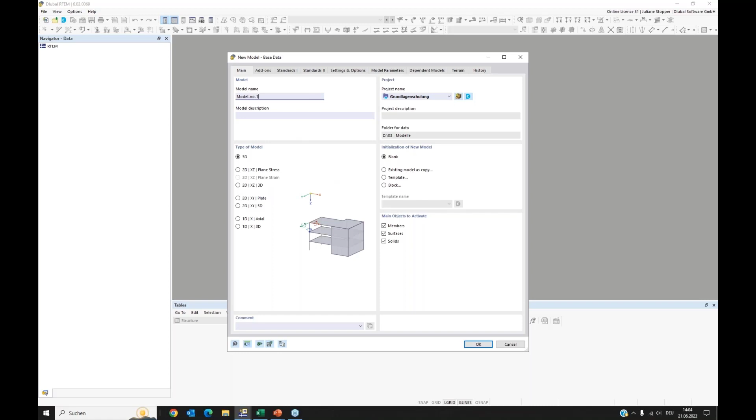In this register, I don't need to change anything. We can jump to the add-ons register and activate our geotechnical analysis add-on. We can find this in the area where the special solution add-ons are placed. So I activate it and press OK. Then our model is prepared, and the add-on will be integrated into RFEM. Here we go - we have an empty model now, and we can start modeling.

At first we go to the materials, and I will create the materials that we need in this first model. I will use materials from the library. We can open the library via this button, and I will use a gravel, a sandy gravel, as the first material. I apply this, then add a next material - we can have a sand, maybe coarse sand - and we add a third material, a medium plastic clay. This is just an example of materials because we will focus on modeling today.

One more thing: when we have the geotechnical analysis add-on activated, we can select the material type soil. When we have a material of type soil, we can find the valid soil material models in the material model section. We currently have the Mohr-Coulomb model, and a nonlinear elastic material model. This model is able to represent the stiffness dependency - the stress dependency of the stiffness of the soil - and it also uses different stiffness for first loading or unloading and reloading. We will have the hardening soil model in the near future.

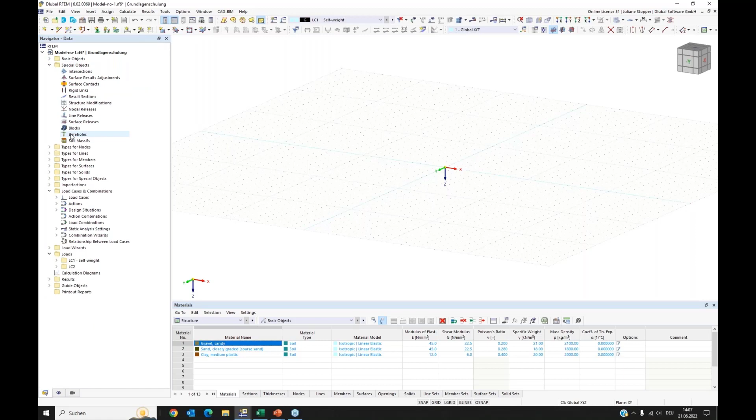We will go directly to the special objects, and here we can see 2 special objects that came with the add-on geotechnical analysis. We have here the boreholes, and we will now use them.

Here we see the dialog for entering boreholes. The boreholes provide you an option to directly enter the data you have from your geotechnical report. For different locations at your field where you will construct your building, you have values along the depth that came from that report, from tests and so on. You can enter this here, the location of that borehole, and you can enter a groundwater level. We will do this here. We give 4 meters. And here you can assign the soil layers.

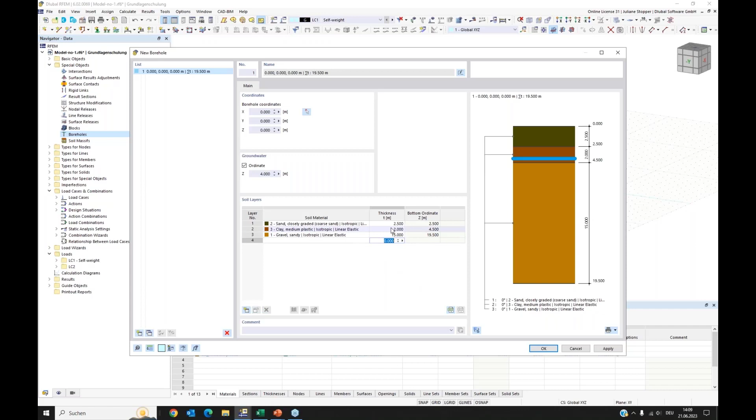We start from the top and go into the depth. In my example, we have sand at the top, about 2.5 meters deep. As the second material, we found clay. It shall be 2 meters, and then we have gravel, which is 15 meters in my example. Now we have the borehole data given, and we can say okay.

Then we see here our first borehole. I will remove this work plane, deactivate it so I don't see it anymore. Here we have the first borehole, and we need some more. We have, of course, more in our field, so I will now use the background layer. We can find it here in the navigator in the guide objects. At the bottom you can find the background layers, and I will open the dialog.

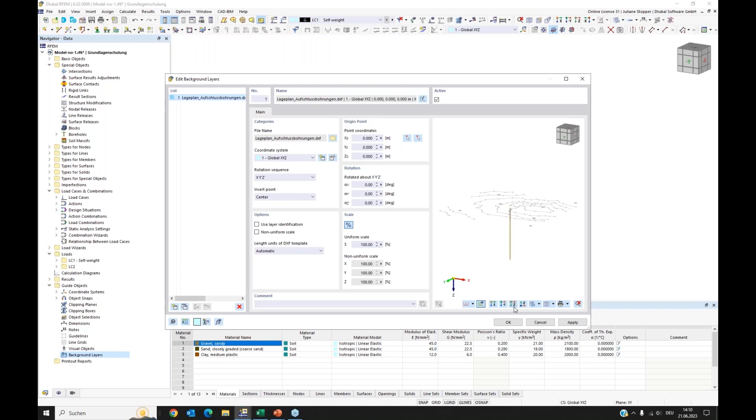As a background layer, we will import a DXF file, and I can do this here. I can directly go here, and here I have the plan of my area, and in that plan the locations of the boreholes are given. I see that I have to transform this. You can do this in this dialog, and this is the plan how it is correct. I want to use the option 'use layer identification.' I activate it, and there you can select the layers of your DXF file that shall be used for the background layers. I deactivate the DL nodes. This is a preview, and I accept this, and this is fine.

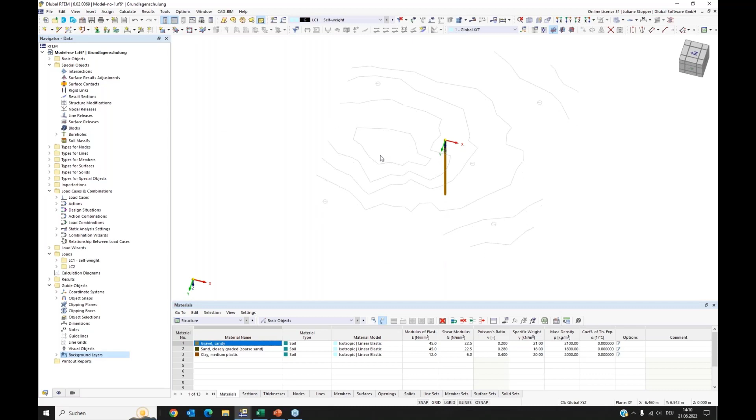Okay, now this is my map with the positions for my boreholes. I will modify the object snaps—you can also find this in guide objects. I only want centers to be picked, so I say OK and set to active. Now I want to place more boreholes via drag and drop at all these locations. Therefore, I create a node at the top just to help me doing this. Okay, now I can select this. I have my borehole and this helping node selected. I press Control and I can move it to the place in my background layer in the graphic. As you see, the last copy is always selected, so you directly can go on copying with drag and drop.

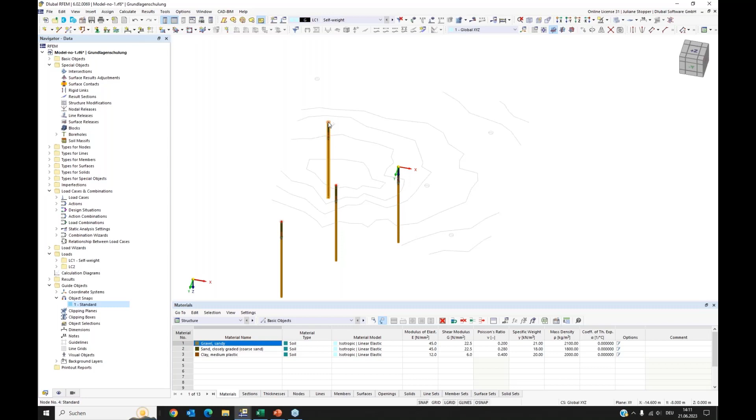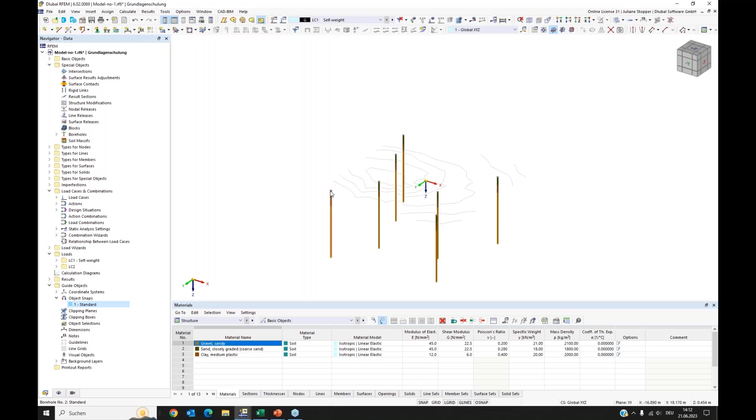Okay, that's it. Now I have my borehole at all the locations. I wanted to delete the initial one because there's none needed there. Now I have placed these boreholes at all the locations that I got from my project partner with that plan. I will delete these helper nodes—I just needed them for the process. And now I have my boreholes prepared. There was no need to measure these dimensions or fill in data manually; you could just use the drawing.

Okay, then I want to use my boreholes. I can use them for creating the soil solid that shall be analyzed. And therefore we have our second special object—you can see here we have the soil massifs, and I open the dialog for this.

With the soil massif, you can generate the soil solids you need for the analysis from boreholes. You can enter the numbers of the boreholes manually, or select them graphically. There I have them assigned.

Then you need to give geometrical information for the soil massif. You have to enter a center, which I keep at 0, and give the dimensions. I will give it 40 meters along both sides. And we have the option to activate a groundwater level.

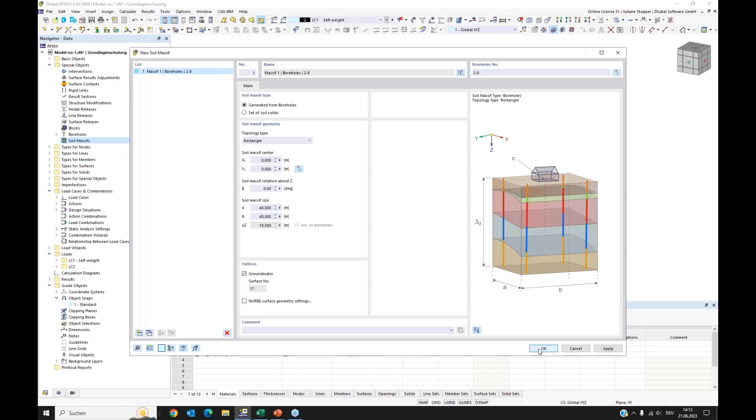Okay, we gave all the input that is needed, and now we can see our soil massif, our soil solids were generated. I switch on the solid model so we can see it more easily.

In the navigator for display, we have the option to change the display so that the color is dependent on the object property. We can also see here the material and the color that belongs to each material.

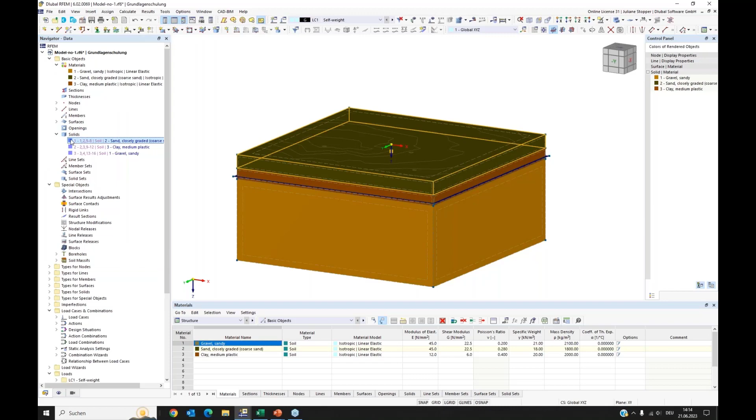So what came with our soil massif? Our soil massif generated 3 soil solids for us. We can find them here. For each soil layer, one solid was generated. And we also have a groundwater level surface generated.

And we also have surface supports generated, this and this. We can see them in this window when we go to wireframe model, for example. Here we can see it: at the vertical boundary surfaces we have sliding support, so only in the local Z direction these surfaces are supported, and we have fixed support at the bottom surface.

So with this generation, the solid is connected to these boreholes. If you change data in the borehole, if you change a layer thickness or something, the massif will be automatically updated. Yeah, so that's it—this is what I wanted to show with the first model.

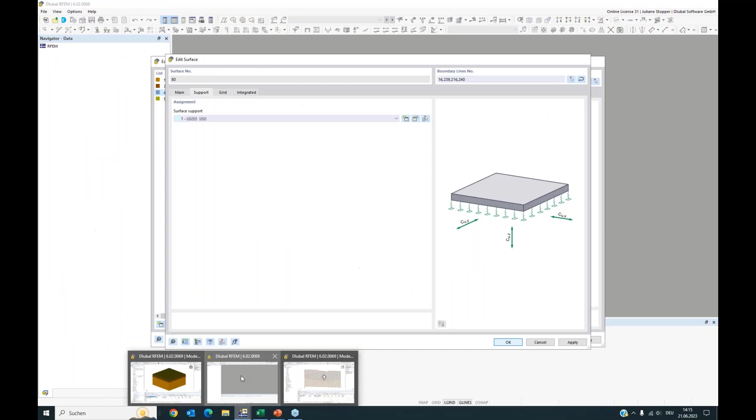We can go to the next example. This one is prepared. I will save it and we go to another RFEM for going on with the next topic. In this next topic, we want to use a DXF file again, but we will not use it as a background layer—we will directly import it. And this I can do here.

I go on File and go to the Import button, and here I can import a DXF file. I have to select the file—I have it here. This is a geological section of the ground, let's say, a drawing. And we will come to an import dialog where we can do last settings before the import.

Here again, I can use this layer identification, and again I don't need all these nodes. In this case my model is prepared, so I don't need coordinate transformation. So I can say okay, it can be imported.

So, and this is it. I have here now the DXF file imported, and now we can see the difference regarding the background layer. Here we have real objects imported—we have lines and we have nodes, and we can work with them. We can edit them, modify them, use them.

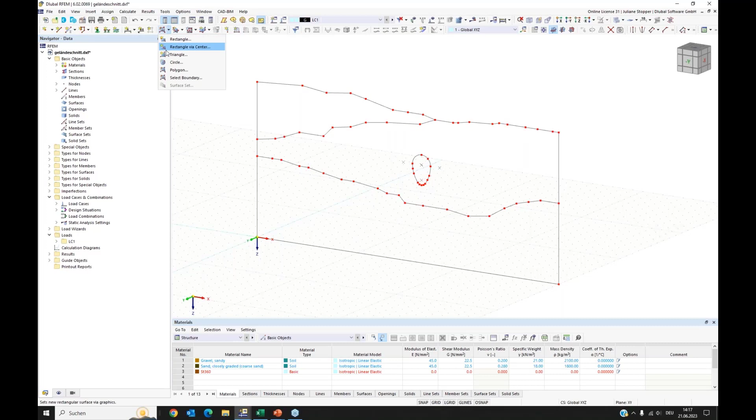Yeah, and this is what we will do. We will use them. My plan is to extrude this model into the depth, and therefore I need a surface here. And this we are going to do. We have here this button to create surfaces, and I use the select boundary option.

I need a stiffness type without thickness—I don't need a thickness, it's just a surface for being the boundary surface of a solid. Okay, I have the first one. I select the next lines of the second surface, and the third surface is defined.

Okay, then I want an opening here—this is, let's say, the shape of a tunnel, a small tunnel. And we have here the option to create openings. Again I use this graphical option where I can select the boundary lines graphically, and my opening is being created. Okay, with escape I can leave this tool, and my surfaces are ready.

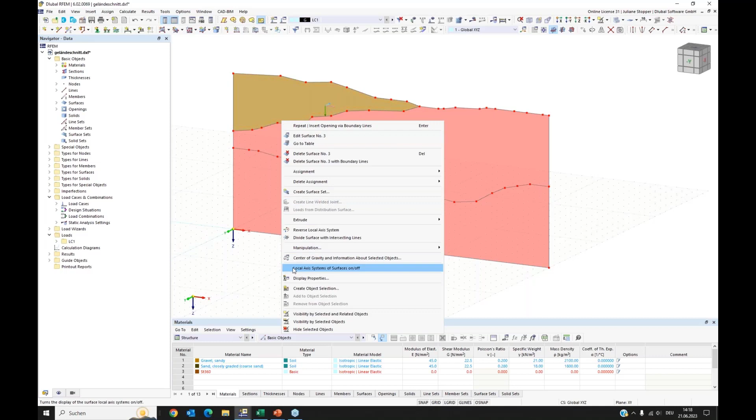Only I want to check the local axis. I can do a right click and switch the local axis system display on. Now I see my surfaces' local axis, and I see this one is showing into the other direction. I want to have them the same orientation, so for the surface I reverse the local axis system.

This helps me now for my extrusion. I now select all these surfaces, do a right click on them, go on Surfaces, and here I have the tool, the option to extrude—I extrude surface into solid. Okay, I have here this preview, but I can go here and enter the value I need.

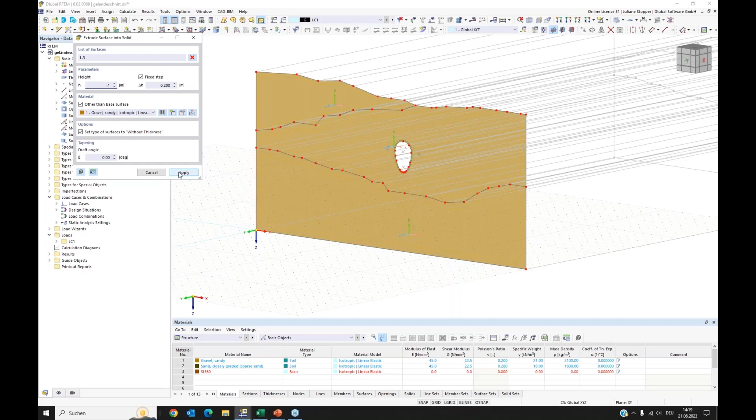I want to have -1 meter for the extrusion. I can apply this, and my model is created. I will switch off the local axis systems. This is a model that can be used if you have plane strain conditions.

Then it's enough if you just cut such a thin layer of your model, and then you can model it.

It is usable for plane strain conditions. Okay, so now here we have solids. What we need is the material.

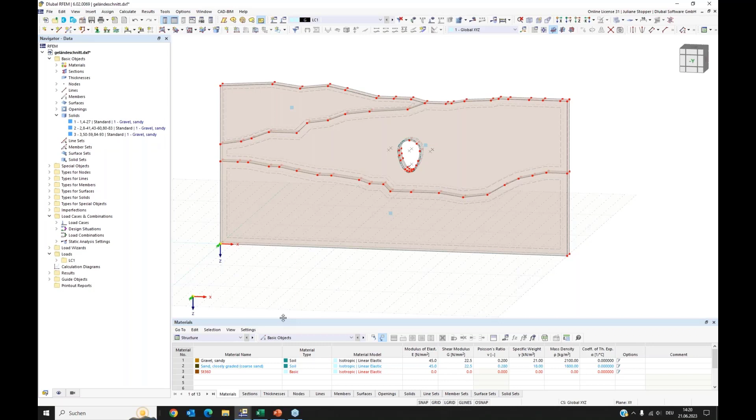I have materials prepared for this model. Therefore, I want to use the Excel import. Let's say I will do it like this. I have here my material and I import it. Okay, and now I have materials.

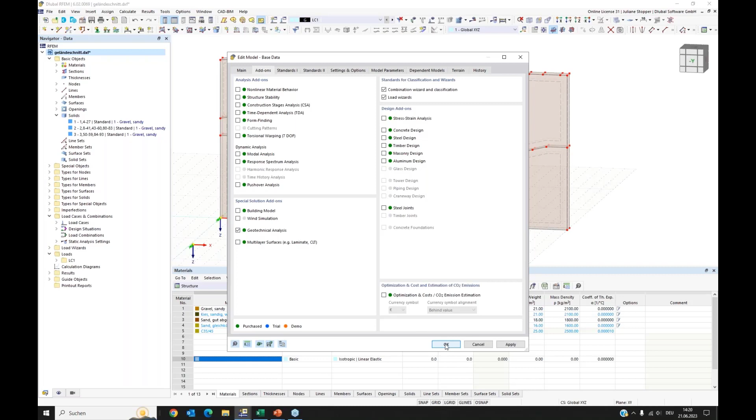Yeah, I will also go to the base data. As we started with the import, we didn't activate our add-on yet. I will do this. We go to add-ons register, and again here in special solutions add-ons, we have it now activated. Okay, now I modify my solids.

They are all standard and they don't have the right material. So I double click on the center of gravity and I can change the solid type. I choose soil and my first layer, yeah, can have the gravel. Okay, this one is ready.

I go to the next one. Here I have a sand. I will use this one. And of course it needs to be soil as well. This is needed, yeah, for having the right material models, the option to use them.

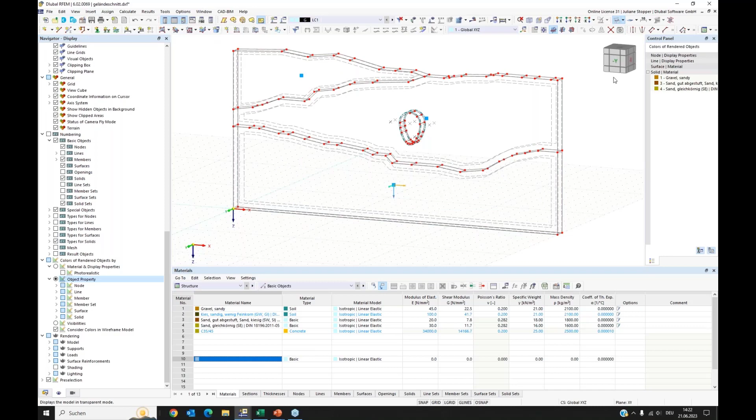Okay, I go to this one and I also set it on soil, and I will go to this material. Okay. Yeah, then I go here. I will change the display so that it is dependent on the object property.

If we look here now, I can see that I have my 3 materials used. Now the geometry is fine, it's finished. What I want to go on with is the boundary conditions. I go to the transparent view and I select my boundary surfaces.

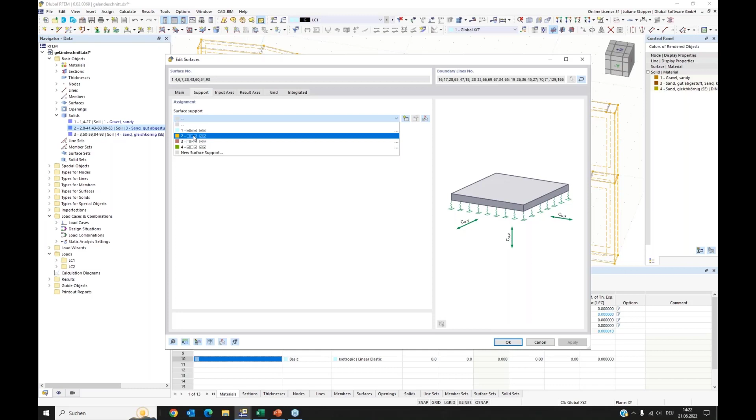With Control pressed on, I can select all of them. Okay, and now we can do a right click here and edit my surfaces and go to the options and activate the support for these surfaces. I have here some surface supports that I can use. I will use this one, but we can have a look inside also.

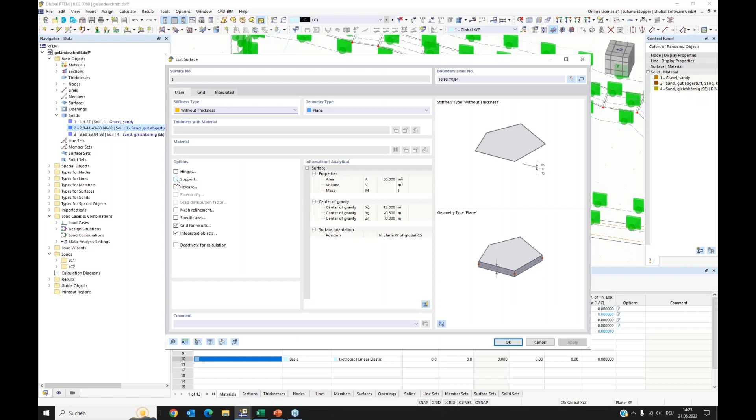Here we can see that the Z direction of the local axis is supported, and we can see it in the display now also. Okay, now with escape I leave these selected surfaces and I select this one, the bottom surface, and this gets a support as well, but the fixed support. Okay, now my model is supported.

I switch off the display of these supports in the display navigator. It's more easy to have the overview. Okay, now I want to go to the next step. I want to create the mesh. I'm doing this here.

Yeah, and I have a mesh which is relatively coarse for this example. We can find the mesh settings here and calculate and mesh settings. And we have here a general setting for the target length of the finite elements. This is valid for all structure parts.

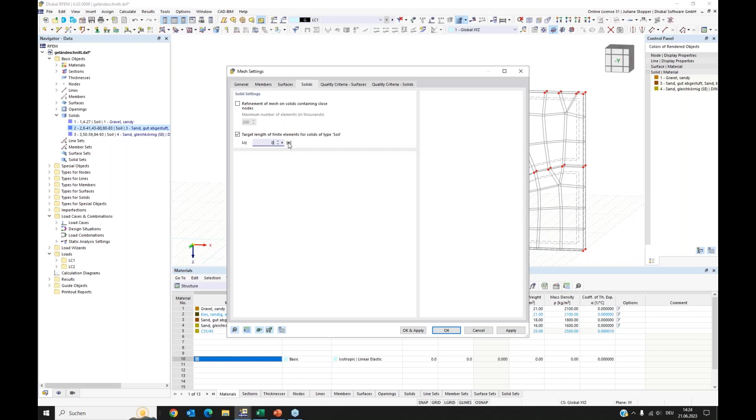And we have an additional setting that you can find here in solids. This is valid only for solids of type soil. So we have an own setting for the target length. Now here for this example, I want to have a finer mesh. I say okay, I don't apply it yet because I want to use another feature for the mesh. I will show you now.

I select the solids and go to the center and say solids, edit, because I go to the options. I want to use a mesh setting, the layered mesh. And I activate it for all the 3 solids. The layered mesh creates the mesh on the surface, and on the other side of the solid, the surface will get the same mesh, and in between there are layers created, and you can here define how many element layers shall be used.

For this model with plane strain conditions, one element layer is enough. So I set this on 1 and say OK.

Currently, it is needed to go here to the layered mesh. This will be worked over, so you don't need to later go there. Okay, now we have the layered mesh activated, and I will create my mesh.

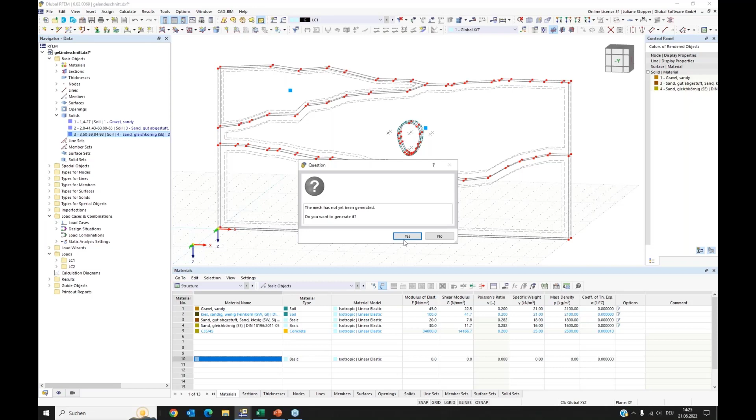Okay, and I can see a nice mesh. We will go to the navigator for display. Currently, we see the mesh of the surfaces, of the boundary surfaces. If we want to see the solid mesh, we have to check this button. And here we can see the mesh in the solid. It's quite regular, and we can see we have only one layer element.

One element along the depth.

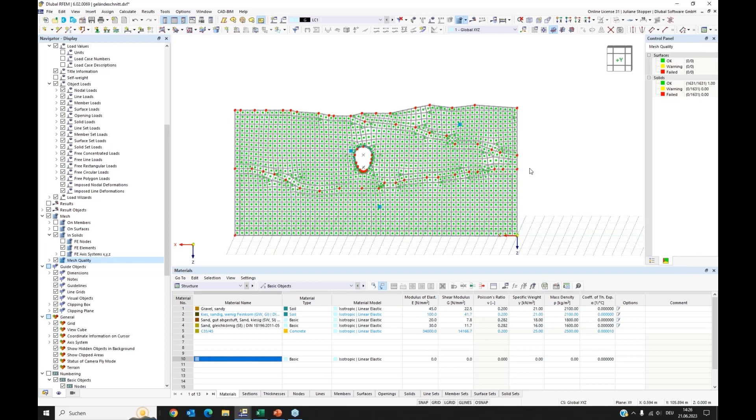One last thing I want to show: you can activate the mesh quality, and here you have an additional register where you can see the color, giving you information about the quality of your elements, and you can also see if there's a warning or even a failed element. The criteria for these categories you can find in Results, now in Calculate and Mesh Settings, where we have the register with the criteria.

Okay, yeah, that's what I wanted to show with the second model. This is finished. Now we can come to the third model and the last part of the modeling section of the webinar. For the third model, I want to continue with our first model.

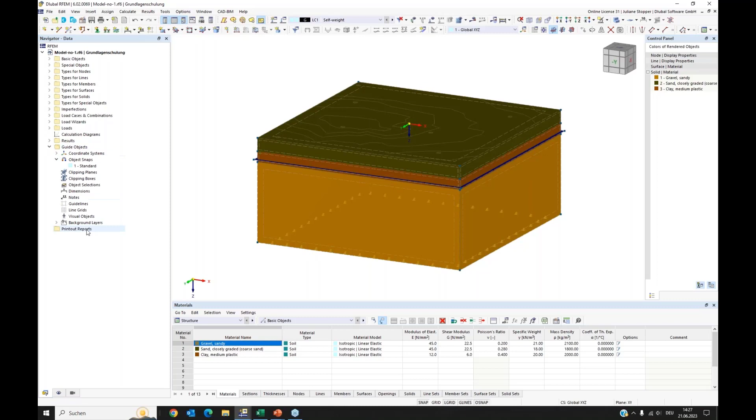This is for showing the IFC import. Here we have our soil solid prepared. What I don't want to see anymore is this background layer. I can go to Guide Objects, where we have the background layer, and I can deactivate it. So it's still there if you need it for graphics or something - you can switch it on again - but now it's not shown.

Now I want to import a small IFC file of a model. We go to Import, and we have IFC here, and I'm choosing this IFC file. It's a very small thing, but enough for explaining the procedure.

This model needs a coordinate system transformation. Therefore, I mirror the Y and Z direction, and I say OK.

Here we have some information about the import. I can see which parts of the IFC model were imported, so you have an option to control whether this is what you expected.

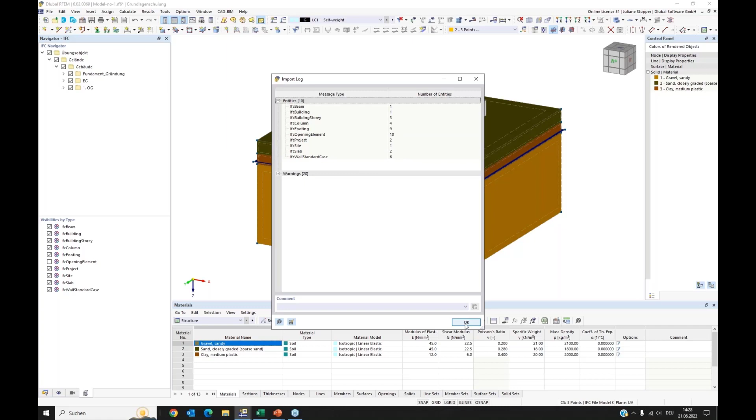Okay, now here we have a kind of IFC viewer, our own IFC viewer. You have here in the navigator an overview of the parts of your IFC model. The IFC structure is a graphical object - it doesn't consist of objects that you can use for the analysis.

So you have to convert them. We need a model for the analysis, so we have to convert these graphical objects. We want to do this now.

One option you have is to use this graphical information with object snap and model manually the parts of the structure you want to create. The second option is you can convert the graphical objects you have here and use them.

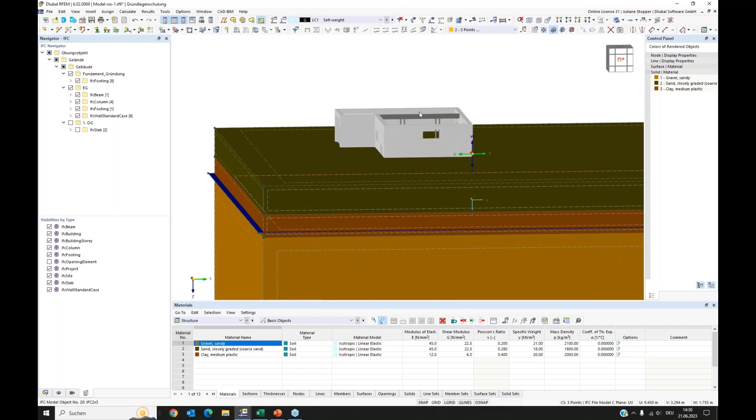I now want to, for example, switch off the slab. Now we can have a look inside of the model, and I want to convert this beam. So I can right-click here on this beam and say convert into straight member. This beam hasn't got a material yet.

That's why it's displayed in red, because we only had soil materials before in this model. I can see in the Edit Member section dialog that there's no material, and I can create a new one from here. The dialog opens, which we can also reach via the main navigator.

And here I can add a concrete material. I will use this one. Say OK - then our beam has a material as well.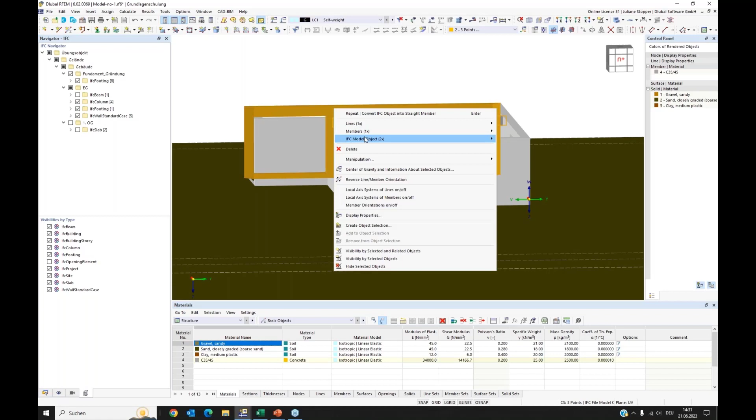OK, you can do it like I did - you can click here and say convert. But you can also do it from here, from the navigator. For example, you can convert all walls at one time with one click. But I don't want to go too deep into it - I just want to show this example.

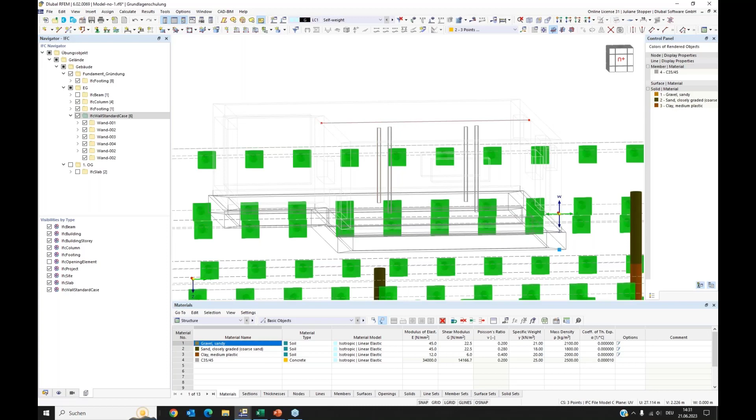You have to do some kind of overwork - it's not enough to just convert it. I will show here: I will now also convert these columns, convert into straight member. It can only convert what exists from the drawing, and the drawing had these shapes.

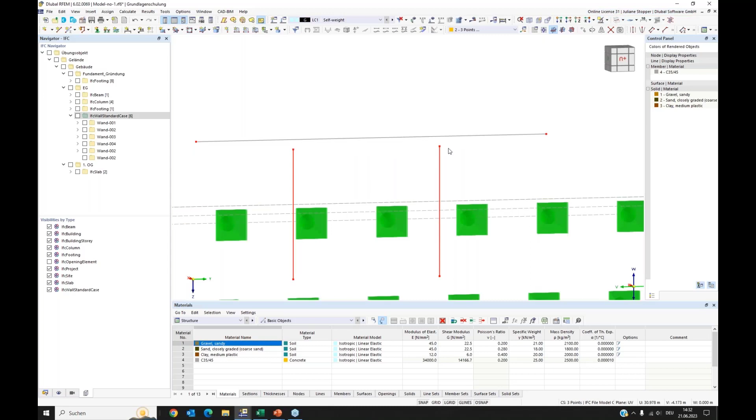And what we now can see, if we look at our RFEM structure, is that these were now converted. If I switch off the IFC model, I can see these exist in my RFEM model because I converted them to analysis objects, but I can see that they are not connected. So I have to do some overwork after converting all this.

For example, in this case, we can extend them up to the next member, and then they are connected. So some work needs to be done to have the full analysis model.

We have our own webinars for this, for different interfaces for the import of IFC files or SAF files. You can find several webinars that go into deeper explanations for this.

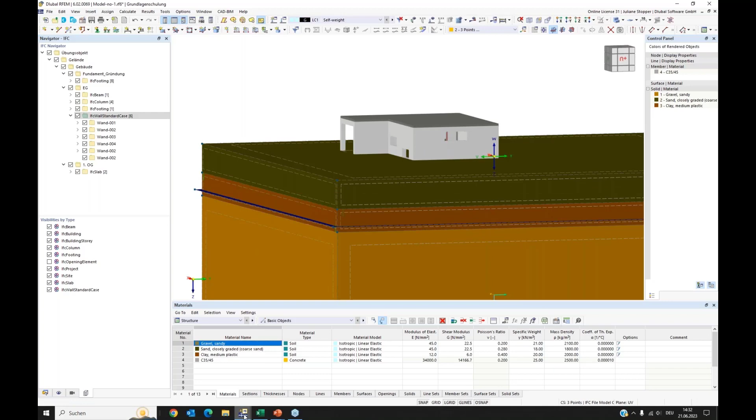I will stop this here now. I just wanted to show this option. We will go to a next model where this conversion is already done. I have it prepared here.

In this model, I had a building that was imported via the SAF interface, and it is prepared now for the analysis in RFEM. However you reach this model, you can use IFC import, SAF import, or other ways.

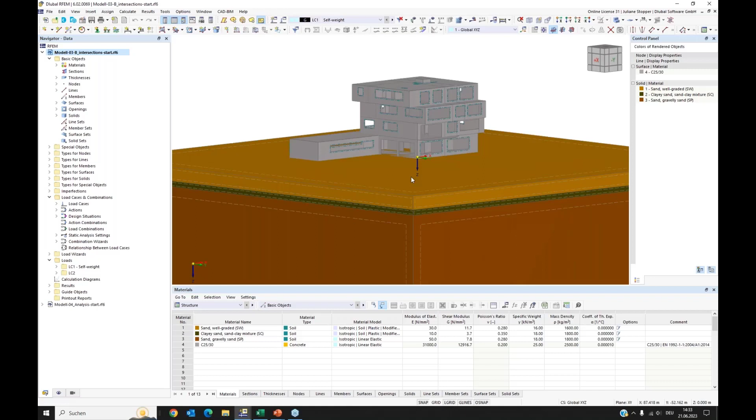Or you can directly model it. Once finished, you can use this building to modify the solid so they are connected. If you have a foundation slab that ends on the top surface of the soil massif, it will be automatically integrated. But here we have a building with a basement or cellar floor in deeper zones of the soil massif, and it is not yet integrated. Up to now, the building and the massif don't know each other - they don't share nodes of elements, so the building is not supported yet.

That's what we have to do - model it so that it is integrated, and I want to do it with intersections. I want to use a solid intersection to cut my surrounding solid, my soil massif, and this is what we are going to do.

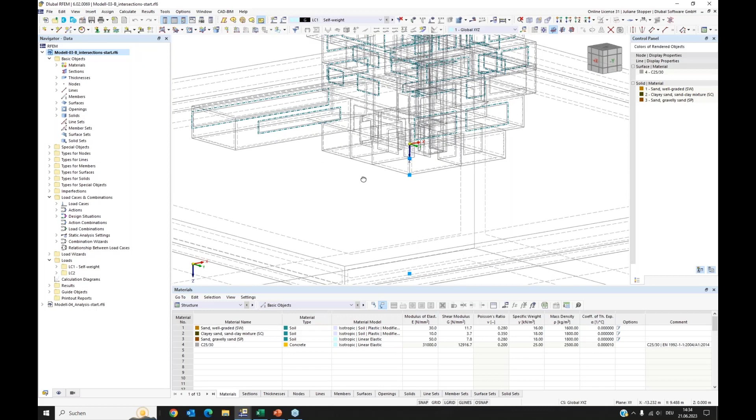I will create a solid help object in the basement floor. Later I won't need it, but I'll use it now for modeling the hole. Here we have extrude, and I say surface into solid, needing it to be minus 2.98 meters. I apply, and now I have my solid here. I have soil solids, and here's a fourth solid created.

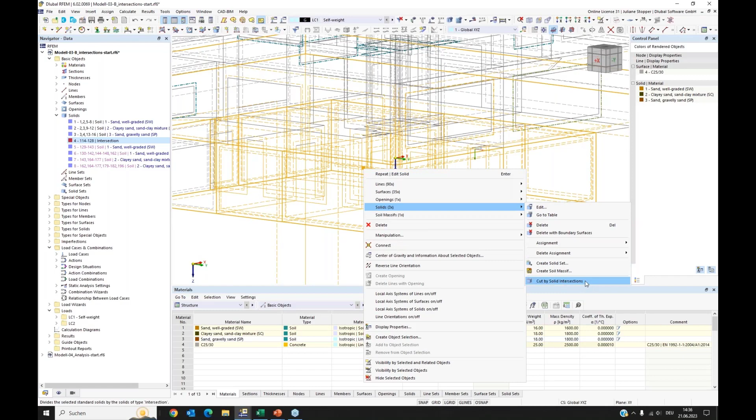This solid I will now edit and change the type to intersection. With this solid type, I have the option to use Boolean operations, and I say yes. Then I select them, go on the model and say solids, and here we have the option to cut by solid intersection, and this is what we do.

Now you can see we have one solid at the bottom, and the upper layers now have the opening. We also have in the building the parts that were cut from the previous soil structure. We can have a look at this - here we can see an opening is created. We will now delete these soil solids placed in the basement floor.

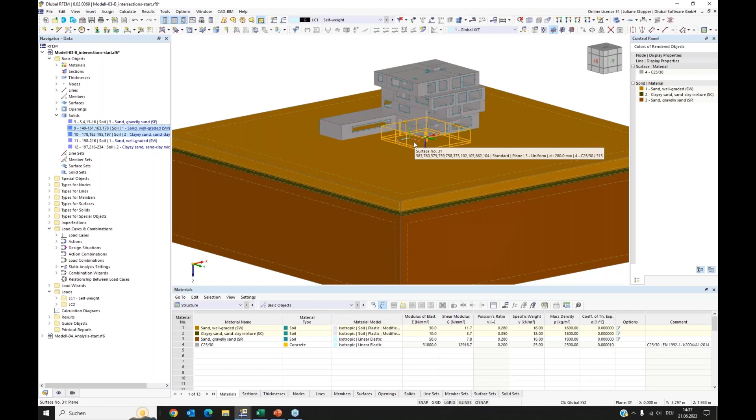In further analysis, when you use construction stages, you can keep them and use them. You can calculate your initial state with all the soil solids, and in the next stage remove these solids. You can model the excavation and deactivate these solids this way. Here now, for just showing it, I remove them.

Okay, so now I have only surrounding soil and my building inside. We can again have a look at this, and now they are connected. They share these boundary surfaces, and the mesh should be good.

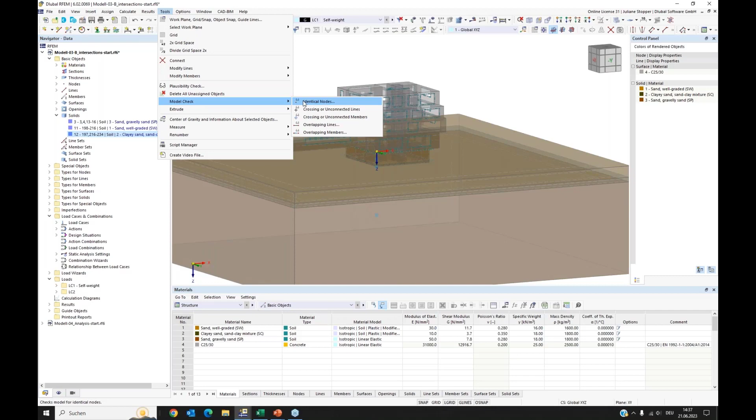I want to show you also the tools we have - model check tools. I want to use it because this model was imported, overworked, and now we used the Boolean operation. So here some identical nodes were detected in my model, and I can use this selection to kind of repair it, to unite nodes or delete unused nodes. I agree, and now these nodes are gone.

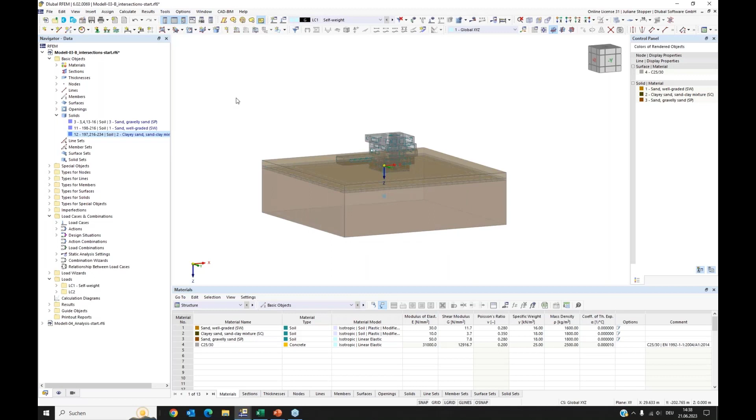Then I want to use the overlapping lines check, and I see I have some overlapping lines. For those I will use this button. Okay, so if we look now, it is fine. Then I want to do a last thing with this model.

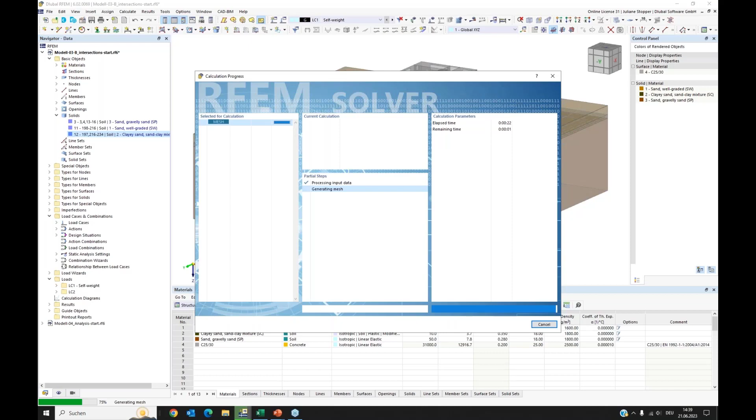I want to create the mesh. It's a bit more slow because of the presentation. With GoToWebinar, generally it wouldn't be that slow.

Here we can see our mesh, and we can also see that it makes sense that we have different mesh settings for the soil solid and the superstructure. That's it - I came to the end with the modeling part of this presentation.

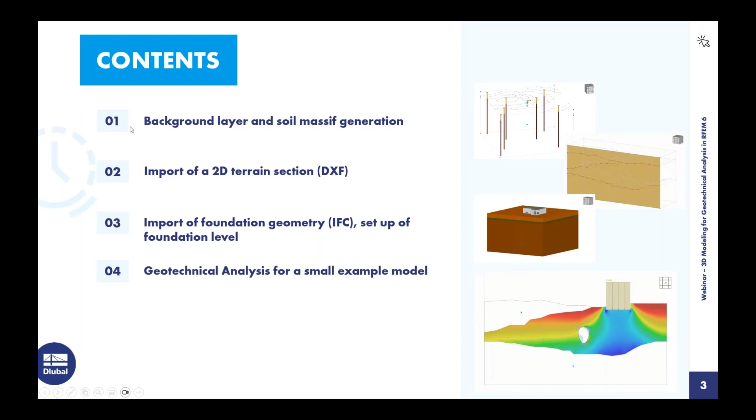I will go back to the slides. We finished the first three steps, and I will show a kind of summary slide. Here we have the modeling procedures that we went through listed, and some additional information. We have several interfaces in RFEM 6, and you can find further information about it on our website.

We have web service and API where you can create applications for procedures you have to do again and again. We have the integration in Autodesk Revit. We have interfaces to Rhino Grasshopper. We have an SAF interface. We have an Autodesk interface.

The DXF file that I imported, I could have also directly imported from AutoCAD - this is another option. We have Microsoft Excel export and import. We have DXF import export interface for IFC, and we have the background layers we saw. Then of course you can directly create the geometry and use all the tools we have in RFEM 6 for model creation. And we have in our add-on geotechnical analysis special objects like boreholes and soil massifs that support you with creating the model.

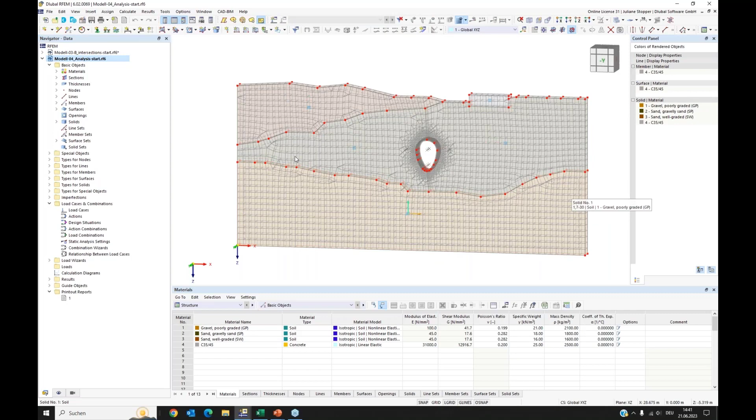Okay, that's it regarding the model part. Now we come to our fourth example. Now we will analyze a model, so I open model 4, and we will have the model in plane strain condition. So I have taken this geometry again.

I prepared it a bit. We have here this existing structure, this small tunnel, and I assigned concrete as material to it. And we have here, let's say, a kind of new structure that shall be erected. And what we want to analyze is now which stresses and strains happen in the soil, and which load, which inner forces will arrive here at the surface of the small tunnel. Okay, for this I prepared the geometry.

Let's go to the materials. I have now the nonlinear elastic soil material used. You can find more information in the online manual regarding the soil materials, and in the last webinar I spoke about this material model.

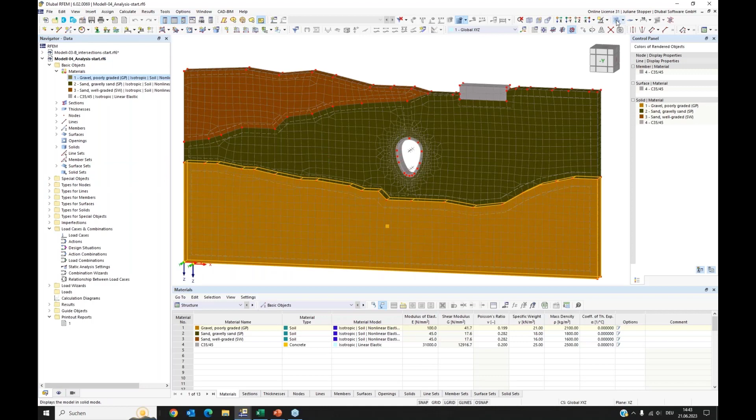Okay, then I have mesh refinement used, we can see here. You can find the refinements in the types. I used a line mesh refinement, and when we have a look inside, here's the assigned lines.

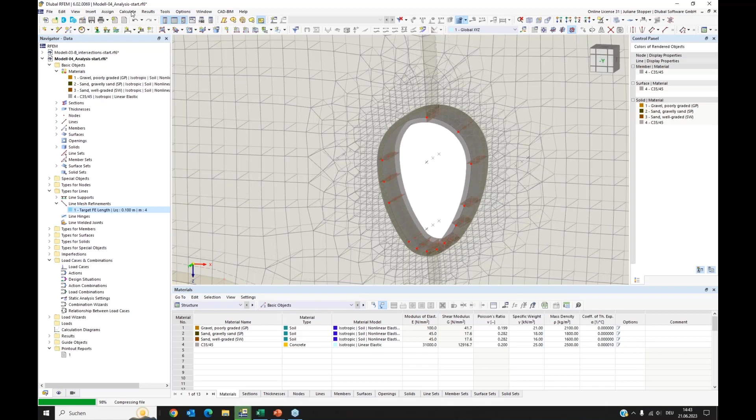We can remove it, I only wanted to assign these lines because it's something nice. The layered mesh automatically extrudes it into the depth, so it's not needed in the next step to again assign the lines. It's with this one line it's done. Yeah, you can see, okay, so we have this.

Then all of the topology is prepared. We can go to the loads and open the load cases and combinations. I click here on new load case. I deleted here all previous settings, so we start from scratch. We will define a first load case.

We will have the self weight of soil. Therefore, we have an own action category that comes with the add-on geotechnical analysis, it's the permanent soil action category. With this action category it's possible to activate self-weight only for soil solids. We need this because in the geotechnical analysis, you need this self-weight of soil load case always as initial state, at least.

Okay, then we create a next load case. I have no static analysis settings given yet, I have to do this. So I create a new setting, I will take the default option. Only I will here use 4 load increments because we have the nonlinear material model used. Okay, I apply this and create a new load case.

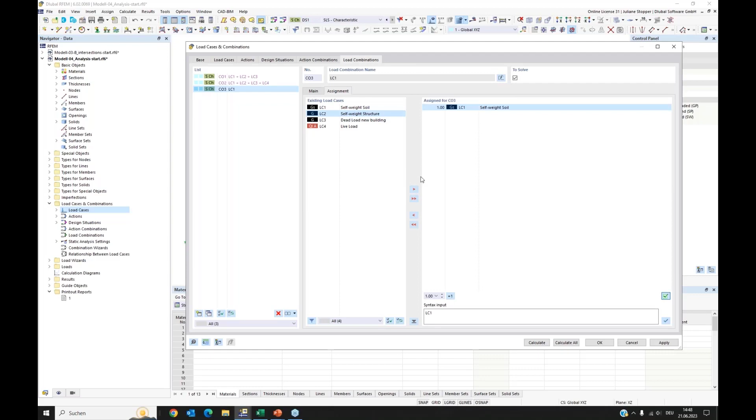Okay, I need another combination. I use the generator, but I can add also manually defined combinations. I want to create, and I need to create my initial state. In my initial state, the self-weight of soil shall be active, and I also want to have the self-weight of my existing building to be active. So I want to calculate the state of my environment, or my soil and this structure, before this building is erected. So I have self-weight of soil and self-weight of this structure.

I need to do something so that this structure is not considered in the self-weight, because this load case would consider all structure self-weight. Therefore, I have here in the options the structure modification that I can use. I activated it, and we can go into this.

We have here the structure modification. I will give it another name: deactivation of the new building. And you have here the option that I used, it's deactivate objects. Here in this window, you can select the objects that shall be deactivated.

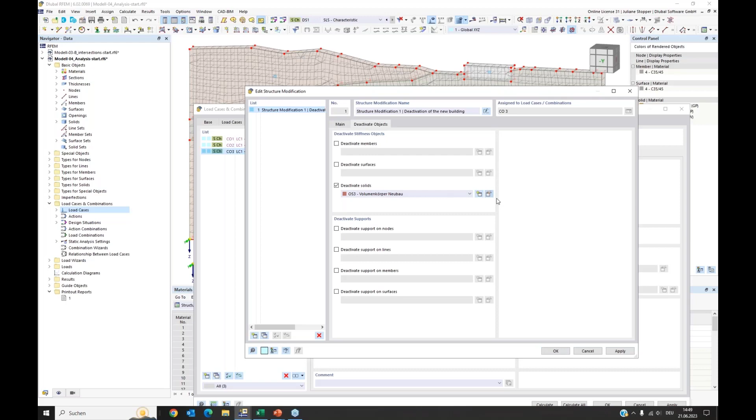We have solids that shall be deactivated, and here only one solid is selected. We can control this. If I look here, I can see yes, my new building is selected. This is fine, I can agree to all this. I have my structure modification active, so in this load case and in this load combination 3, my new building will not yet be considered, which is fine because I want to have here the initial state calculated.

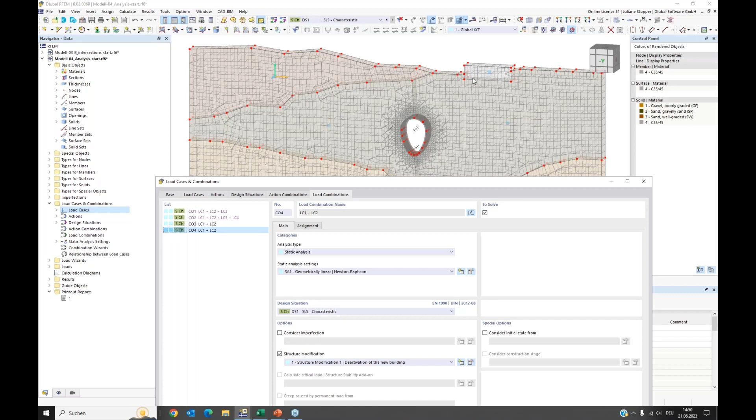I also create a copy of this load case. I now want the following situation for my initial state: I need to know the stresses of this soil, because the soil material reacts stress dependent, so I need to know which stresses are there for using the right stiffness for further loading. What I don't want is the displacement, I want it to be reset to 0. When my building is started, I want the displacements to start being considered.

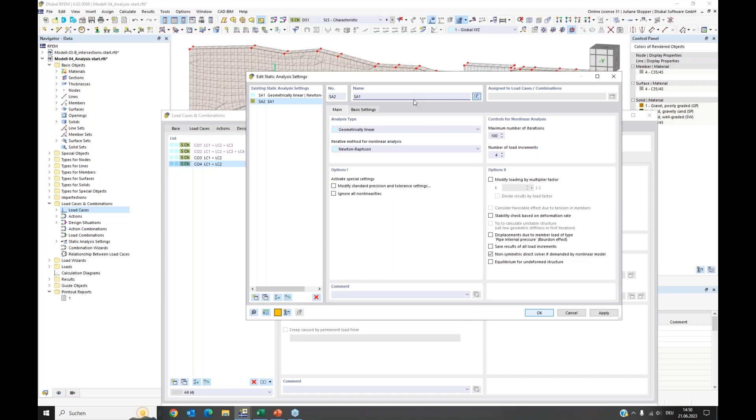Therefore, we have a special static analysis setting. We can go here and I will create a copy of this and rename it. It's actually the same as SA1, only it is for undeformed structure. The setting you can find here in options 2. We have here the option equilibrium for undeformed structure. So when you use this setting, the equations will be solved, the model will be solved, the stresses will be calculated, but the deformation will be reset to 0.

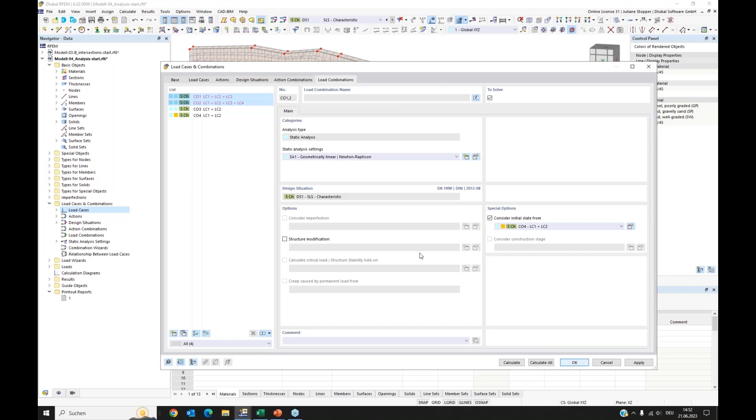This is what we want, and for this combination 4 I will use it. I want this initial state with 0 deformations, but with the stress state, to be considered in my combinations 1 and 2. So I select these 2 combinations, and here in special options you can consider the initial state, and I select this one. So my loading in these combinations starts with the stresses, and the deformations are set to 0. So with the stresses of this model, the deformations are kept as 0. Now we have this prepared.

What we need is loads. We created load cases, but we have to give also loads. I will use this button here and define a dead load for the new building, and say OK. The dialog opens, I can select the surface. This surface will be used, and I will assign 100 kilonewton per meter square. Now what I wanted to show is that you actually can stay in this dialog and press apply and next, then it would open, but okay, I closed it.

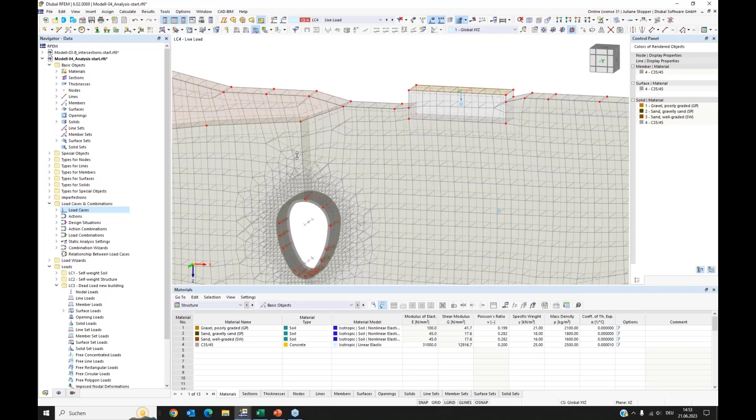So we now can use live load. I will again assign the surface, and you can use 125 kilonewton per meter square. We can control this graphically, we have the live load and the dead load, and if we look in the combination we have both of them. That's it, I can also give some more color.

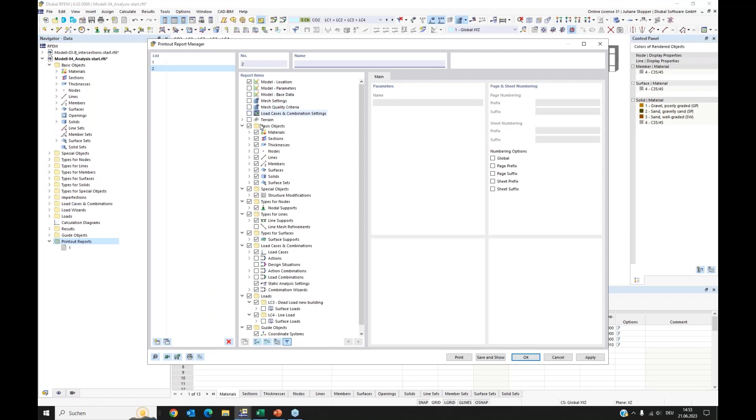I have something prepared for this model. I prepared a printout report for us. This can be found in the navigator at the bottom. Here you can do a right click and create a new printout report. You come to the printout report manager, here you can select the topics you want to have in your report. I cancel this as I have already prepared it. I would like to shortly show it.

I prepared it so that I can print graphics now during the analysis process. Yeah, we will do this. Okay, this is the first version of my report, and we have something good: you can change the language. We can here in edit set the language, we want English language, so this is a nice feature. You can work in your mother language, and when you work for other countries and have to give another language, you can change this. Okay, I will close it, and we will now from time to time print into it.

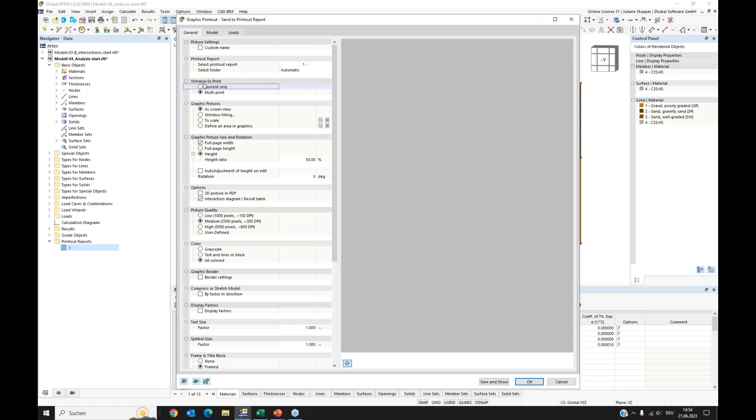So I want to also print this loading situation. So we can go here on File, Print Graphics to Printout Report, and you get a preview. I want to only print the current window. Here we see a preview, and it looks fine to me. I say OK, then it is saved in the report, but it will not be shown, and I can go on working. I can have a look later.

Okay, now everything is prepared and we can start the analysis. We can go here to calculate and say to calculate. And now I would like to at first show this one.

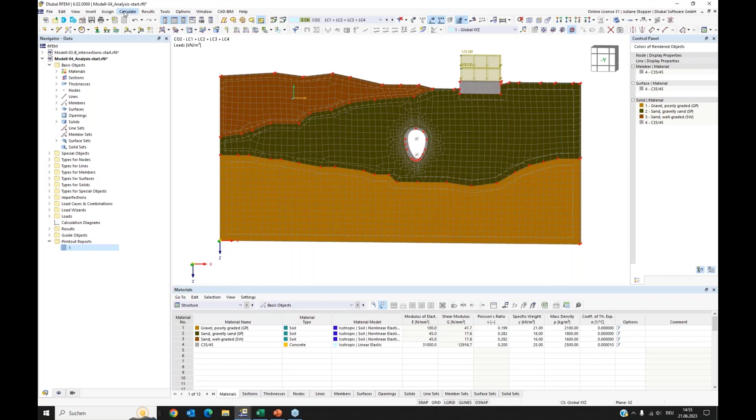Now this initial state is calculated. I want to also calculate the rest. We also could have selected this before. I will select the design situation, characteristic, and then all the contained combinations will be solved. So I select this and say OK.

Yeah, here we also can see the load increments. And it's okay. Now it is done and we can have a look at the results.

First of all, I want to remove the results of this helping structure. Let's say we don't need to see this. I can here in the control panel select what shall be displayed, and I want to have the object selection. I prepared an object selection that only contains soil solids.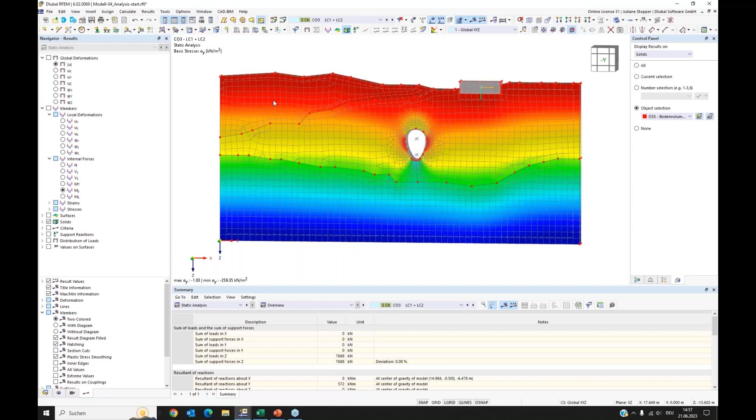Okay, but first of all, I want to go to the initial state. So what we have here is the initial state. It's the self-weight of soil and self-weight of this structure. This we deactivated. We have a deformation here.

And we have, of course, stresses. And this is what I said. I also deactivate the mesh.

This deformation we don't want to see in our results. That's why we reset it to 0, because when I go and start my construction of this building, for me, there's 0 displacement at the beginning of this load case, or load combination. So that's why we have this copy where we said reset displacement shall be used, and we can see it worked well. The displacements are 0.

But if we have a look at the stresses, we will see that we have stresses. And we can also compare it with the previous combination, and we see it's the same. So this is the initial state stress, the geostatical stress, and you can also control it.

You can check it with a hand calculation. You can calculate with the specific weight and the heights of these layers. You can compare it, and you will see it's plausible. I did it, and it's good.

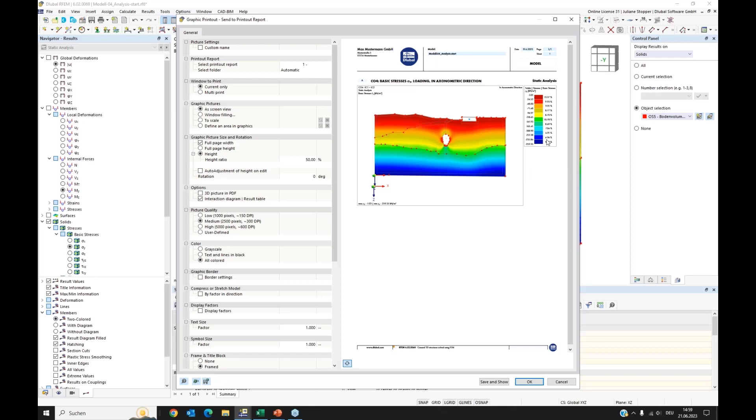Okay, then we can print the graphic. So we have a graphic of the initial state in the report, and yeah, I like it, so I say okay. And then we can go to the next load combination, and I will go to the leading one with the highest loads.

This is this one. So at first we can look at the deformations, and here we can see how, with this helping structure, let's say, it deforms, and how the deformations go to the deeper soil layers, and we have here the deformations.

Okay, but now we want to have a look at the stresses. We can here select solid stresses, and what we have here is the final state of this combination. So we have stresses of the self-weight, of the soil, of the structure, and also of the new building.

We have the option to select another type of result. You have the option to just see the stress that came through the delta load between the initial state and this combination. So what came after the initial state is only this load.

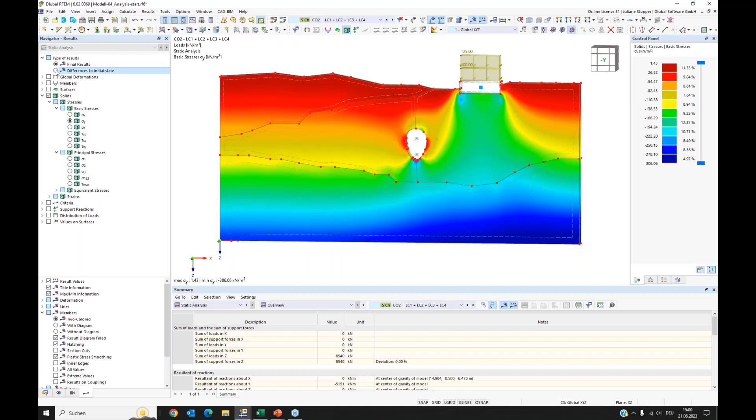And if you activate this button here, you will see the load that came minus the initial state. And we can see now the stresses that are caused only by the new building.

And here we can see very well how it goes into the soil, into the deeper zones, and that here some stresses reach our shell of the tunnel. Yeah.

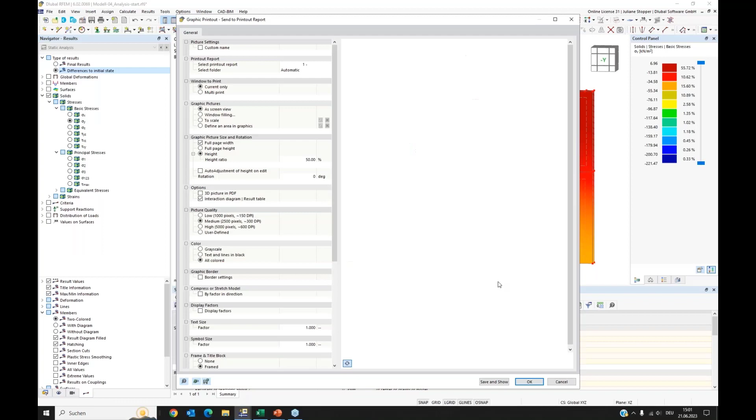I want to also print this one to the report. And we have again our preview, and it's fine. So we again can say OK. And I want to also see the final results and print it to the report.

Okay, a last step. I want to show that we can also have a look now at our tunnel, at our construction. We want to know what comes there. And I have created a result beam. If we see here, I put a line in the center of this surfaces of the tunnel shell, and there in the middle I placed a result beam that integrates stresses and forces of these surfaces that I assigned.

So the surface of the tunnel.

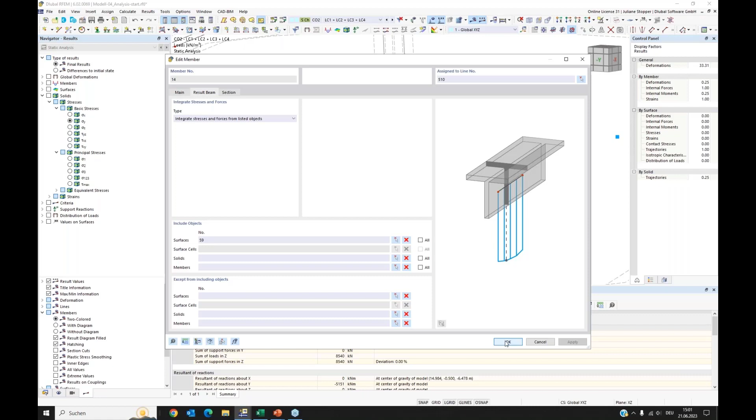That's why I can use now member results, and I can see what reaches due to this load combination in my tunnel. Again, I could also select the differences to initial state. So this is, for example, the moment that came only from the construction of this new building, and I also can look at the final results. So in total, I have this moment.

Now I can also check other internal forces. I can check displacements and so on. Yeah.

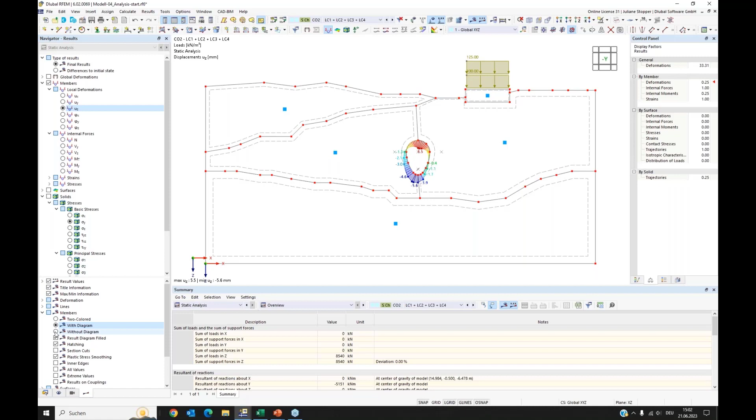What we can do also is select members, as we have the result beam. We can also select a colored shape, and then print this as well to the printout report. And I want to use the multi-print because I want to have the same view, the same perspective.

I will use this load case, this load combination, and here you can select what kind of forces you want to print. I want to print the normal force, the My, and the displacements. Okay, I say okay. Yeah, this is it.

I came to the end with that model. This is what I wanted to show you in this first, short analysis. This is the first step of the analysis of this situation, giving first information about the stresses, strains, and displacements that are to be expected.

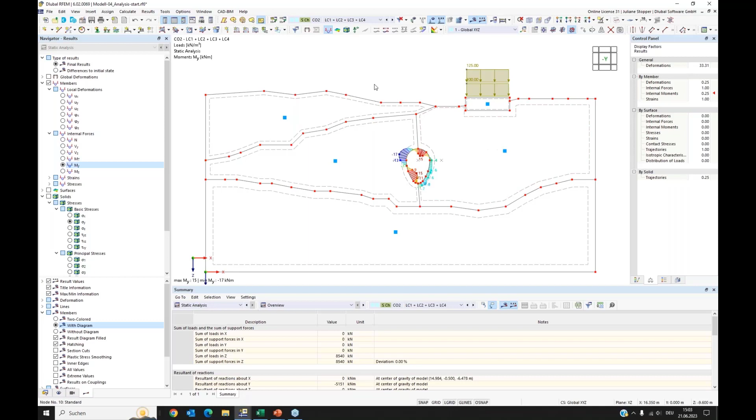In a further, deeper analysis, construction stages could be used and the phases of the situation could be modeled more in detail. You would model only the soil, then remove the soil in the next phase, construct the tunnel shell in the next phase, do the excavation, and so on. This you could model with construction stages. But for today's webinar, this is what I wanted to show you.

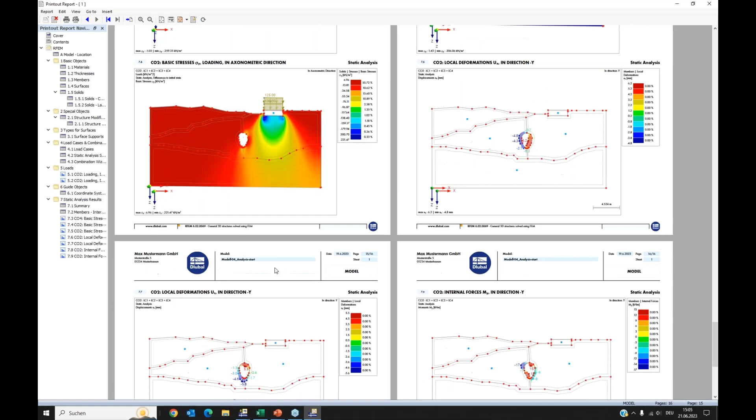As a final step, I would like to have a look into our printout report. Here we now have our report, and we have all the graphics that we printed besides. We have an overview about the situation, and we have our multi-print here.

It's easy to modify your report. You can, for example, click here and say start with a new page. Then we have our tunnel information here. And one last hint, in the material, you can do a right click and say edit, and we have the option to activate our soil material so we get information about it.

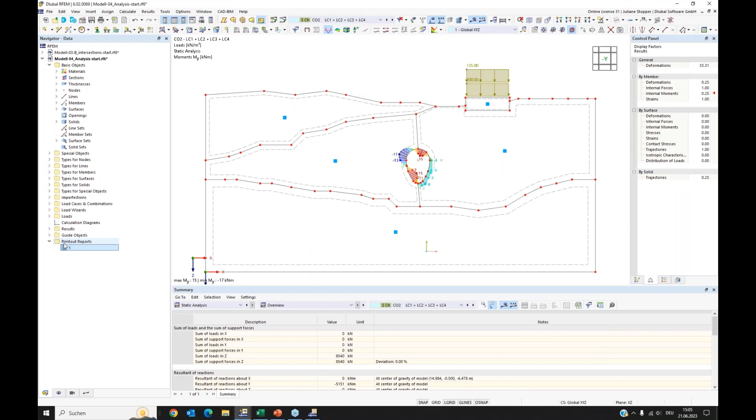So it will be shown here also the values you gave for cohesion, for E modulus, and so on. Yeah, maybe I should have pressed this button. Save and show. Then it should come.

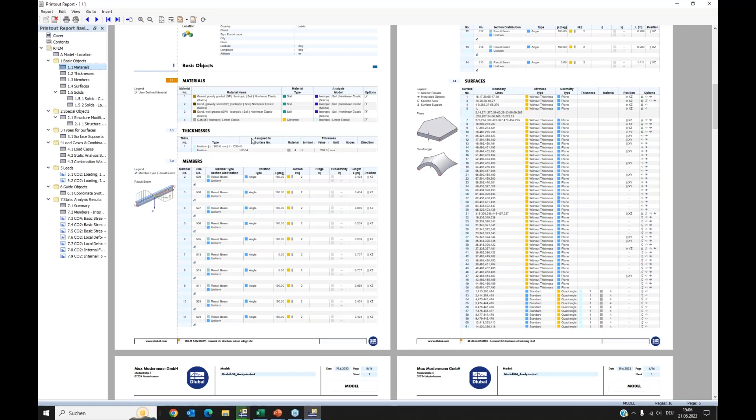Yeah, this also is maybe a bit more slow because of the presentation with GoToWebinar. It's generally not that slow. Here, this is what I wanted to show. You have the option to activate this detailed information about the nonlinear elastic or the soil materials information.

Okay, that's it from my side. This is what I wanted to show with this webinar. I hope it gave a good introduction of modeling techniques, of import options that you can use if you have some files or data from project partners, to make your modeling procedure more easy. I thank you very much for your participation, and I wish you a nice evening and much joy with our software. That's it from my side.